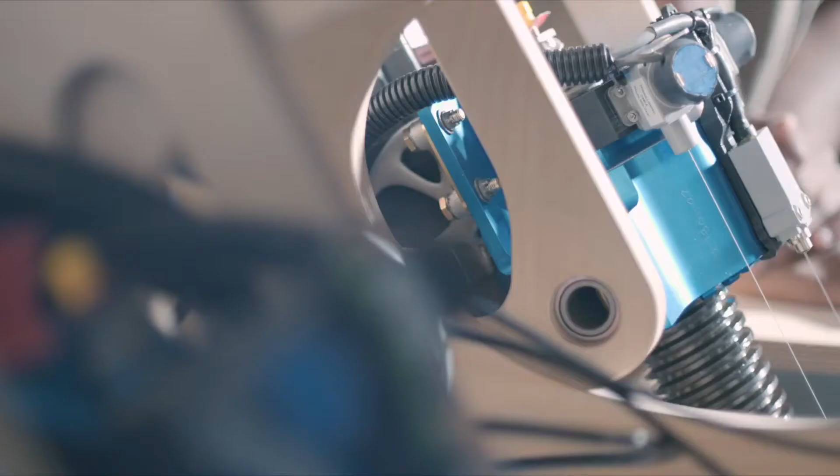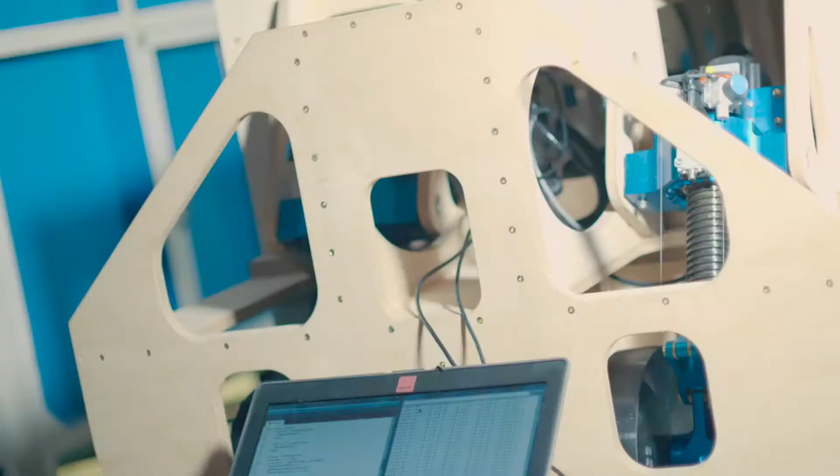The Hyperloop Deployable Wheel System, or HDWS, is designed for the low speed requirements of the Hyperloop and also for emergency scenarios. It is inspired by a traditional trailing arm landing gear, and it is designed to fit the low space constraint of the Hyperloop itself.

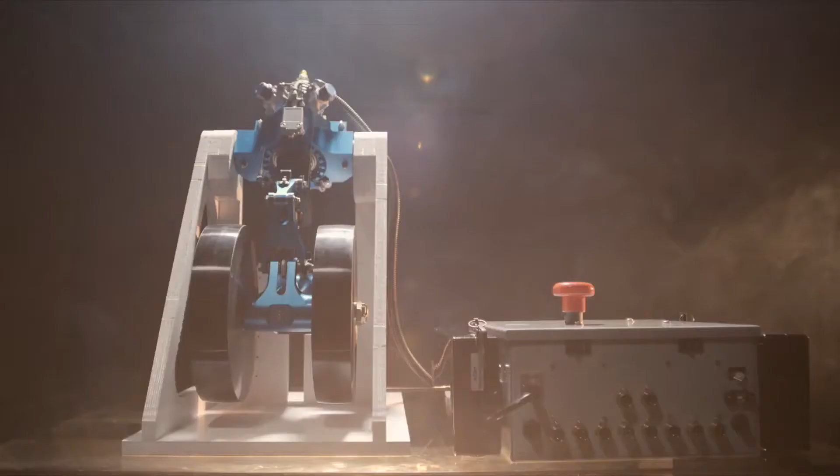It is scalable in design, and it follows a plug and play approach such that it's fully electric, and it's very modular in the sense that it can interface easily with other Hyperloop designs.

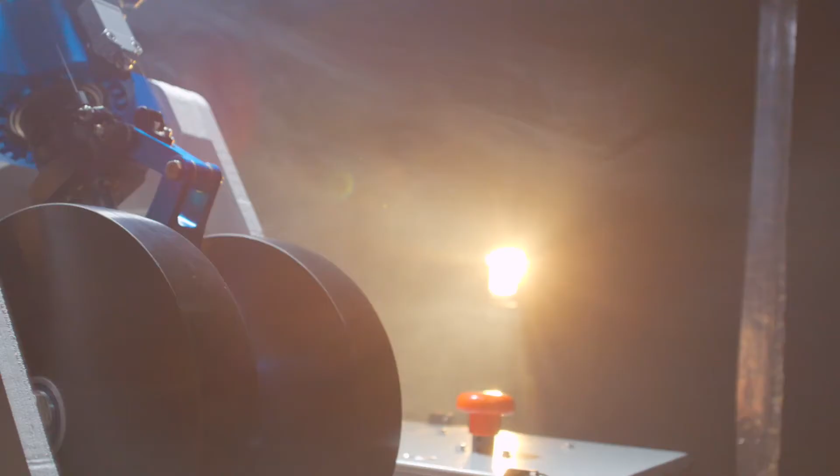As you can see here, this is an image of our Hyperloop deployable wheel system in the fully extended position and the fully retracted position. From fully extended to fully retracted, it takes about 2.5 seconds. Several components of our deployable wheel system use advanced manufacturing techniques such as additive manufacturing.

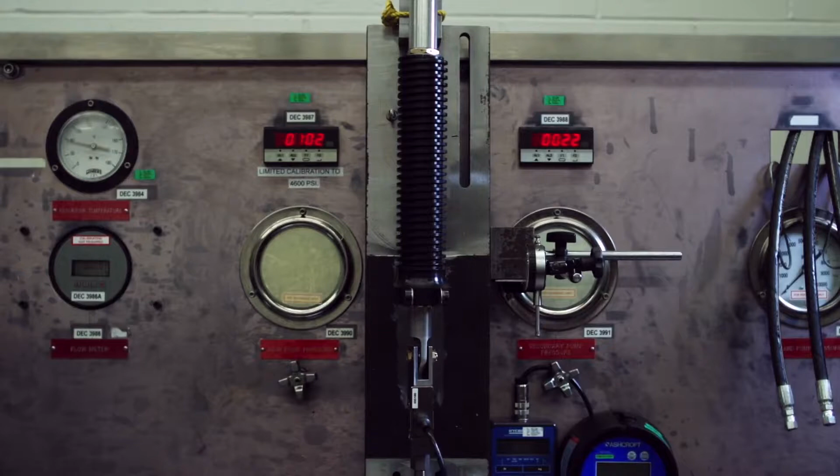The extension and retraction mechanism of our Hyperloop deployable wheel system is also fully electric, and it uses several feedback sensors to control the height of the Hyperloop pod. The active feedback control has a hybrid suspension system that consists of a shock-absorbing strut dampening vibrations.

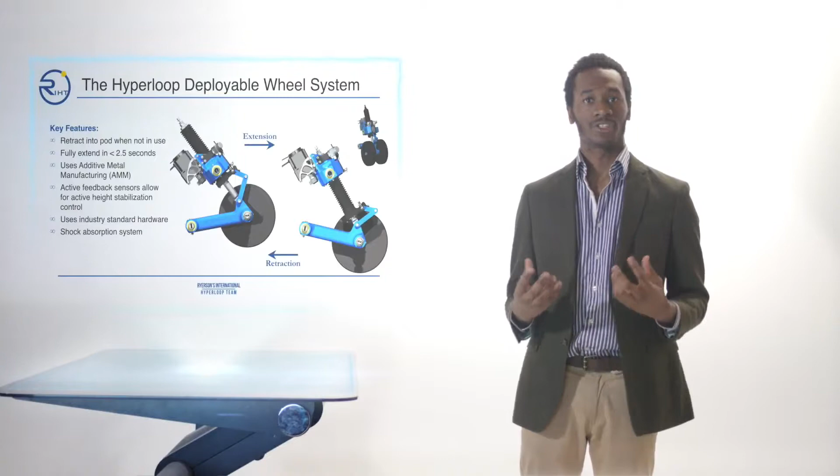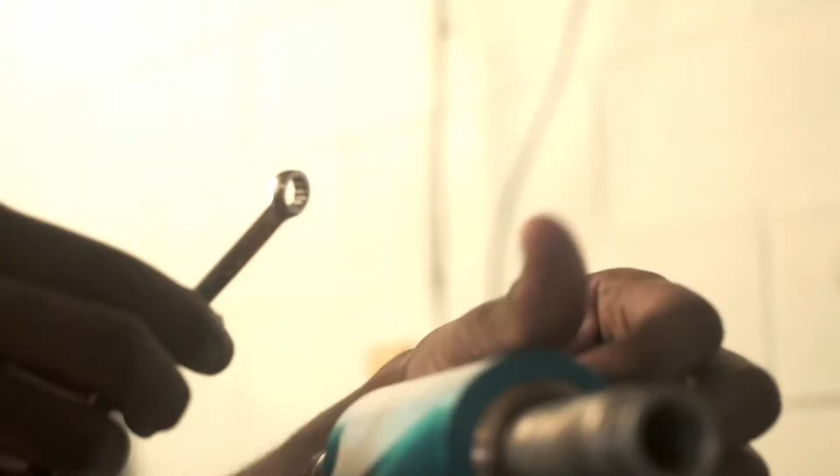We also made use of various industry standards and hardware that allowed us to create a product best fit for the Hyperloop. By focusing on a single subsystem, we were able to go into greater detail in the design process, generating detailed part drawings, assembly drawings, and CAD models. These parts were also analyzed using classical methods and FEA methods.

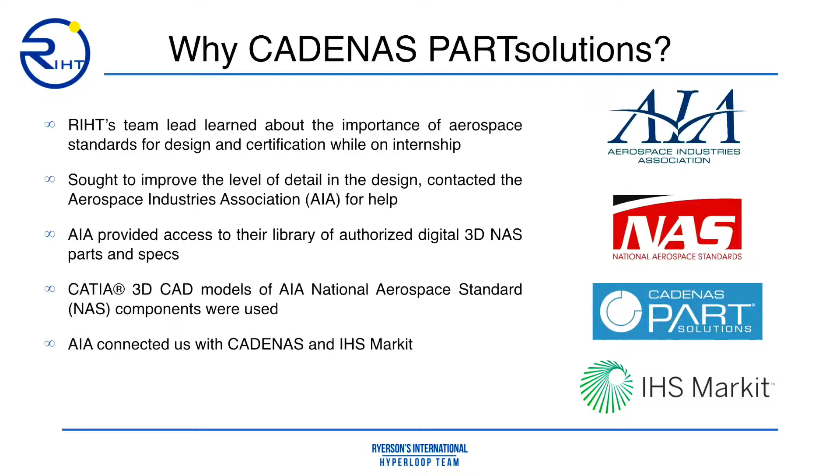So when it was time for us to use aerospace standard hardware in our design, I contacted the Aerospace Industries Association for help. They set us up with CADENAS PARTsolutions and IHS Markit, which enabled us to access the Aerospace Industries Association's standards with 3D models. We then applied these 3D models in our native CATIA application to the Hyperloop deployable wheel system concept.

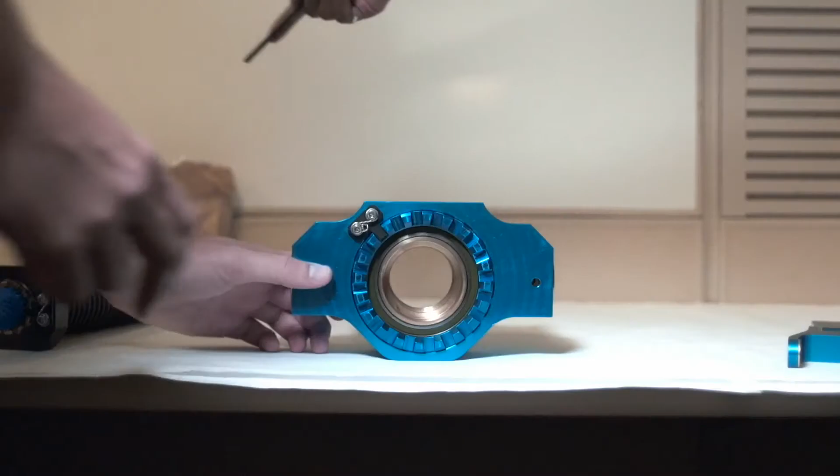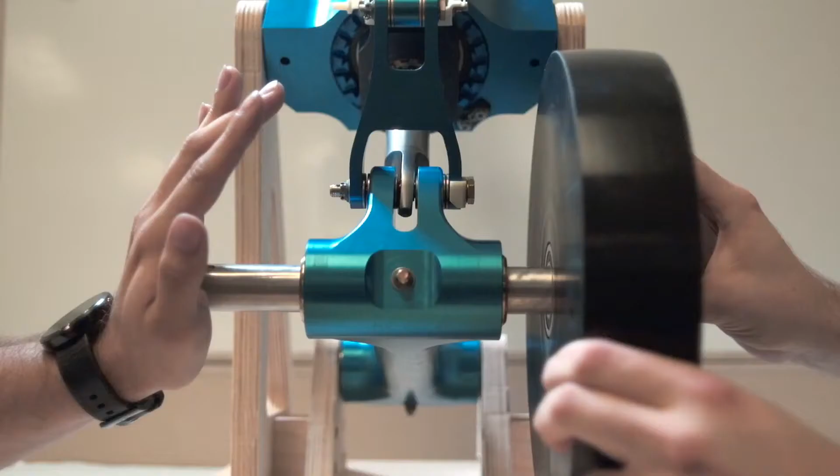We had the ability and the time to generate detailed part drawings, assembly drawings, and even perform classical and FEA analysis on each of our components. Our custom manufactured parts were designed to the highest detail and specs available on the market through our sponsors, and we used certified aerospace components such as NAS and MS parts whenever possible.

While on internship, I learned the importance of using aerospace standards in the design and analysis process. Naturally, when we were developing the Hyperloop deployable wheel system, I wanted to incorporate those practices to make our design as high quality as possible.

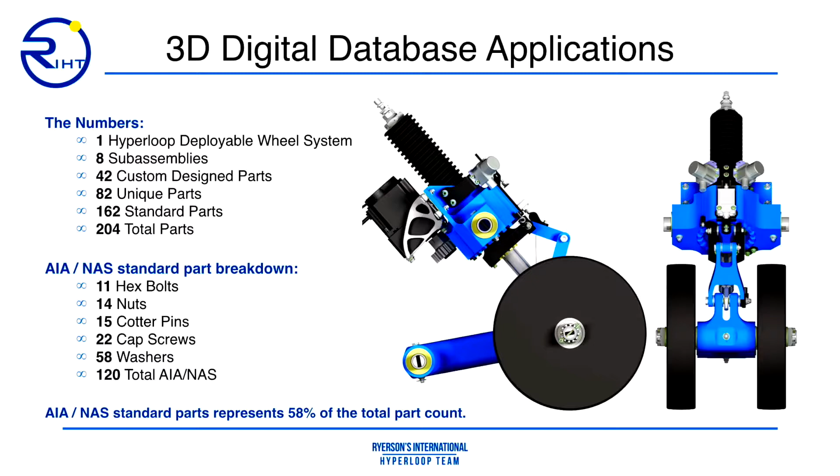To give you an idea of how important standard parts are in our design, one Hyperloop deployable wheel system consisted of over 200 parts, 160 of which were standard parts, and of that 160, over 120 were NAS, AIA standard hardware parts. In fact, the AIA NAS standard parts represent over 58% of our total part count.